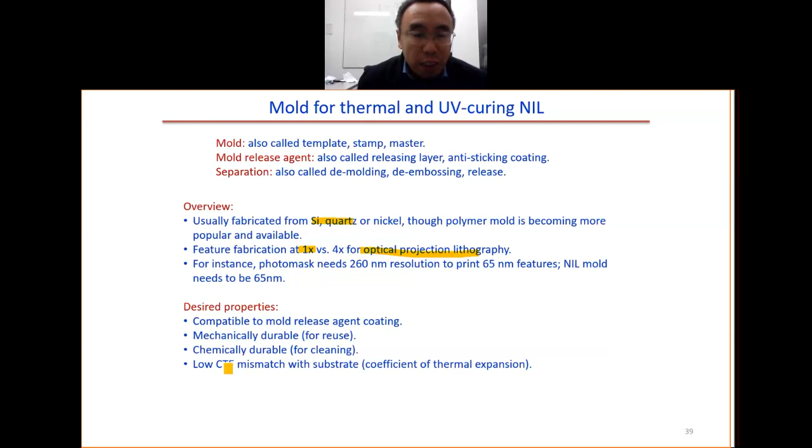So the property we need for the mold: first, compatibility with the mold release agent coating. This is very critical because many materials, even though they have good mechanical or chemical properties, are not compatible with the mold release agent coating. Then we need it to be mechanically durable, chemically durable, and have a low coefficient of thermal expansion mismatch.

For optical lithography, because of diffraction, we need many tricks to improve resolution, such as optical proximity correction. Another thing we work on most is the phase shift mask. We also use the phase shift mask for optical lithography. For the imprint, we don't need optical proximity correction or phase shift mask. All we need is to make a mold that can achieve very high resolution patterning.

So here are the mold issues. First, regarding the sidewall angle: this will be difficult, because when you do the imprint, it's very hard to separate, it will be like stripped. A tapered sidewall will be easier for separation, but then you lose resolution, since the feature size on the bottom is different from the feature size on the top.

But a vertical sidewall is obviously easier to detach the mold from the wafer. For sidewall roughness, if the sidewall is rough, this is not good for separation. This kind of sidewall shows a ripple, wavy, zigzag structure, which is the typical profile using a deep RIE.

For deep silicon etching, let's use the Bosch process. When we use the Bosch process, we get this kind of wavy sidewall profile.

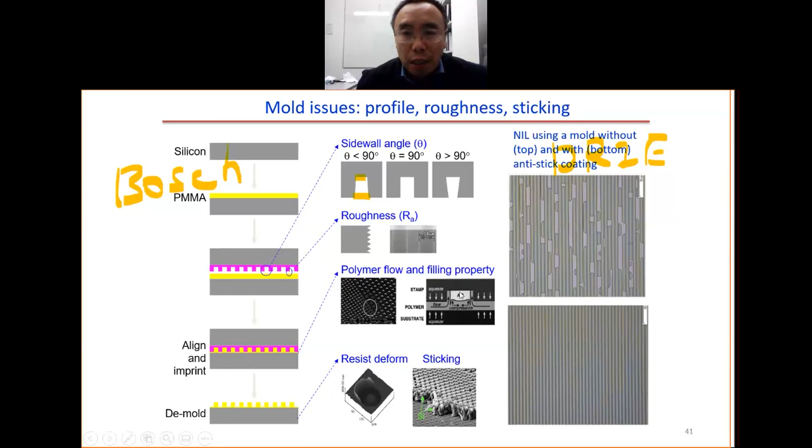For the mold, another issue is polymer flow and filling property. If we have very big features, the filling may be a problem. Finally, there's resist deformation. You can see here the resist got deformed, with a sticking problem. This is also a major problem.

As you can see here, on the top side, the mold without anti-sticking, anti-adhesion coating shows peel off, where the resist got peeled off. On the bottom side, with the anti-sticking coating, there is no peeling off. So how do we do this anti-sticking coating?

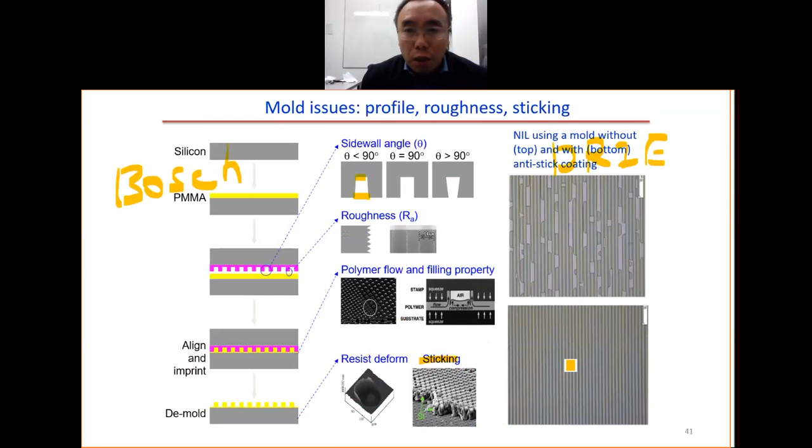This is actually the major secret for imprint lithography. In 1995, Professor Stephen Chou's group from University of Minnesota asked a student to spend about a year to find how to make the mold have very low surface energy. But he wanted to keep it secret. So when he published the paper in Science, he stated clearly that no mold release agent was needed. But actually, this was wrong information, meant only to mislead people. As a result, other people could not duplicate the imprint for maybe 2 or 3 years, until they realized that you need some anti-sticking coating on the mold surface to make it actually work.

This material is the most popular one for mold treatment, called FDTS, perfluorodecyl trichlorosilane. Another popular material is called FOTS. The only difference: this one has O, which stands for octyl, meaning 8.

This one is D, the decyl. Decyl means 10, so we have 10 carbons. This one we have 8 carbons.

We know fluorocarbon gives you low surface energy, but you cannot coat fluorocarbon onto the wafer surface. For example, the most popular fluorocarbon material is PTFE, polytetrafluoroethylene. This will obviously give you very low surface energy. This is also called Teflon. But if you coat a layer of Teflon on the wafer surface, this will not work because the Teflon will not adhere to the wafer. So the Teflon film will not adhere to the wafer, and when you do the imprint, it will be peeled off easily.

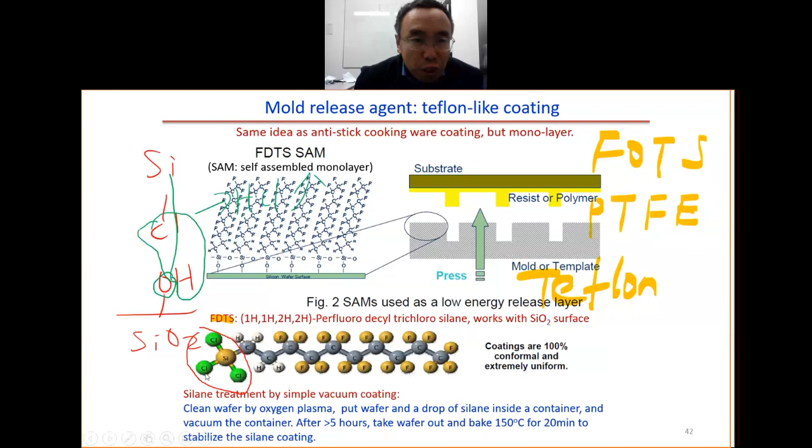But here you also see the lateral bond, the silicon-oxygen lateral bonding. How does this lateral bonding happen? This is because you have trichlorine, three chlorines. How does this work? It's like this: we have one silicon here with chlorine, and you have another nearby one, silicon here with chlorine.

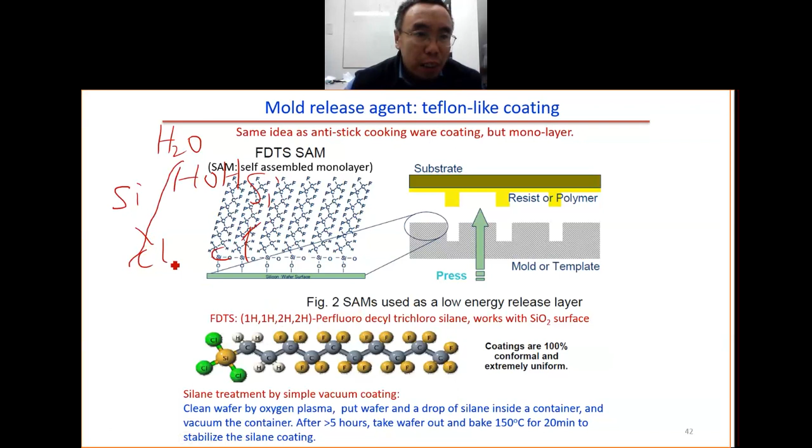In the environment, there is always water, and water is like HOH. Effectively, this H will take away this chlorine to form HCl, and this other H will take away the other chlorine to form another HCl. So in the end, you leave behind this oxygen here, and this oxygen will come to here. So you have this oxygen here, and you get this silicon-oxygen-silicon bond. Effectively, you form two HCl molecules to take away the chlorines, then you have the oxygen bond.

So normally you clean the wafer, then you put a drop of the silane on the wafer. This silane is a liquid. You put a tiny drop, maybe a microliter, inside the container and pump, vacuum the container. After several hours, you take it out, do the baking, and you get a very high coating quality, making the surface very hydrophobic.

Some of you may know we have this nanorobotics group, at the University of Waterloo. The task for the nanorobotics group is to move micro objects as fast as possible and pass the barriers. You move the object very fast.

When you want to move the nano or micro object very fast, you need the surface to have very low surface energy, very low friction force. The people from that group came to me, maybe 7 years ago, and asked me how to make the surface very low friction. I told them to do this kind of process. Later on, they won the first prize in the nanorobotics competition in the world.

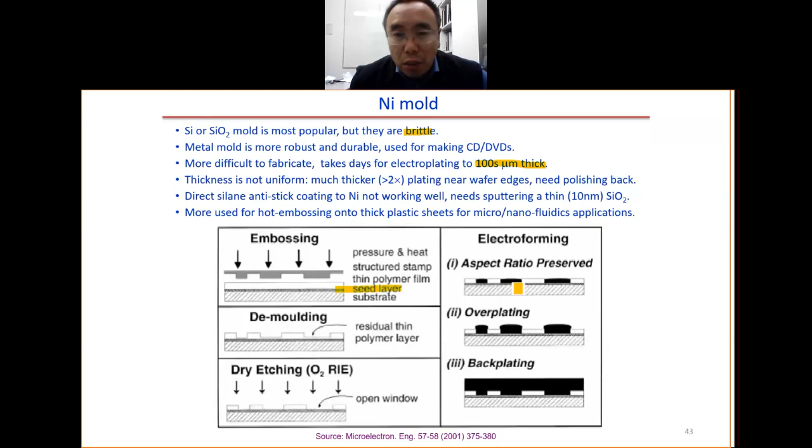Then you do the electroplating, you overplate, you grow the backbone, which is hundreds of micrometers thick. This takes a day or maybe even longer time to do the plating process.

Another problem is that the edge plates faster than the central part. You can imagine when you have more ions come here. When you do the plating, you get more ions to the wafer edge than to the wafer center, so the growth here will be faster than the growth on the wafer center.

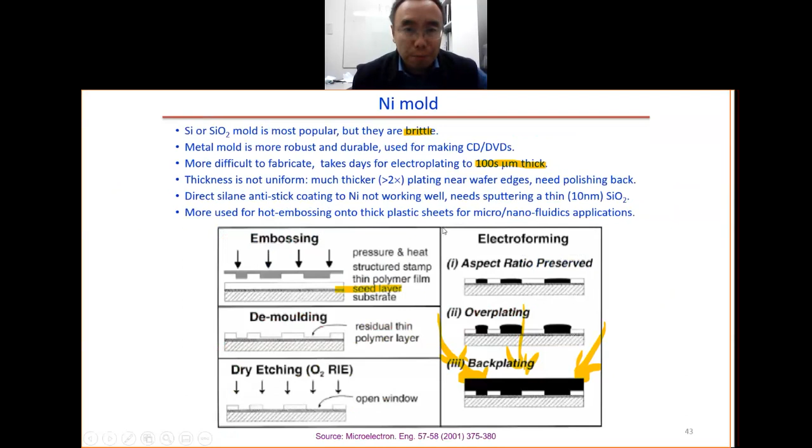You need a polish-back process. Another problem is that nickel is not very good for the anti-sticking coating. So what you can do is coat a layer of silicon dioxide, then you can do this process to make the surface a low surface energy. And this is the nickel mold.

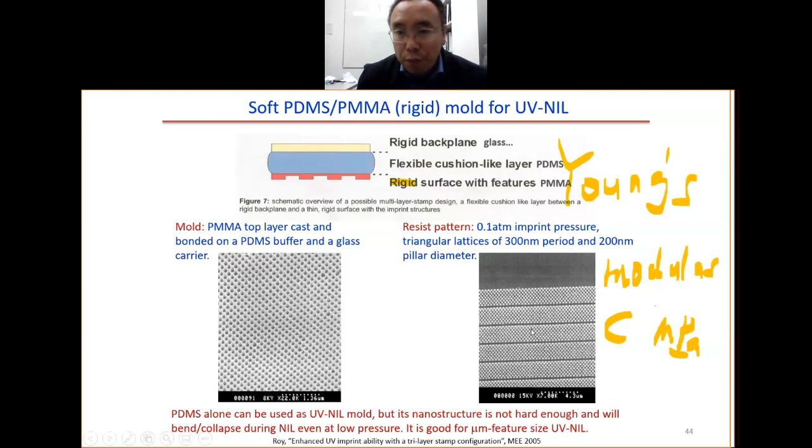But here you can see you have this mold. After imprint, you get the pattern into the resist. Here it's done by using UV imprint, at very low pressure UV imprint.

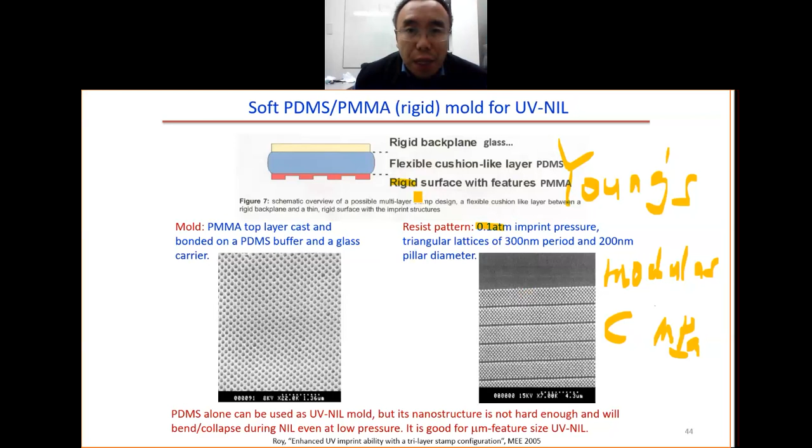But the problem is that the PMMA is not compatible with this process. You cannot make the surface low surface energy. As a result, maybe after one imprint or maybe two imprints, the mold will have lots of peel off. This one in that case is not good, it's only good for maybe one or two time imprints. Then there will be a peeling off problem because this one cannot be made low surface energy.

This one is good, you can have very low surface energy with this anti-adhesion layer. This one, the backbone is PDMS, a plastic, soft plastic. Because it is plastic, you can do the imprint onto a curved surface. You can see here, you do the imprint on the optical fiber because the PDMS is flexible, very very flexible, soft.

So how do you make this mold? First you coat the coupling agent and coat the imprint resist. This is the PDMS, you coat the coupling agent. Because the resist has low surface energy, we use a coupling agent, you get better adhesion of the resist onto the PDMS substrate.

Then you do the UV imprint. This layer here is the UV resist, the UV curable resist. You do the UV imprint, they separate, and you get the mold. So you can see, it's not hard, it's not difficult to copy the mold from this master mold onto this polymer mold.

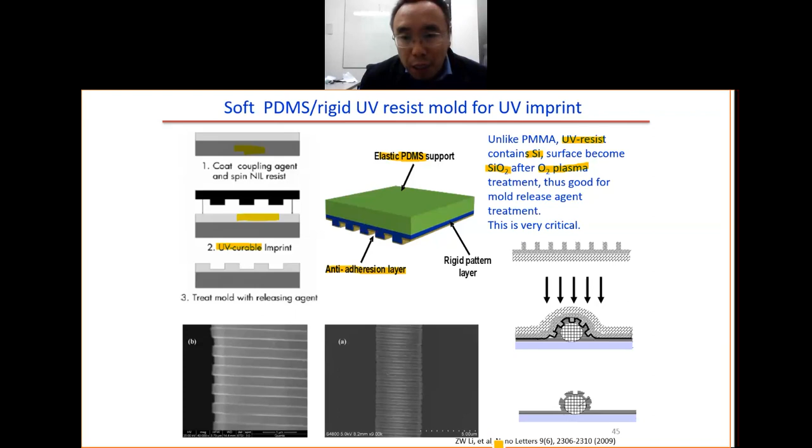So here the mold material, this one is the UV curing resist. We know that for the UV resist, it contains silicon, lots of silicon inside. Then if we do the oxygen plasma treatment, the surface will become silicon oxide. So when the surface becomes silicon oxide, you can do this process to make it a low surface energy for imprint. That's why this is a very good mold, that's why it's published in Nano Letters, a very good journal.

So this is the fluoropolymer mold. We know that normally the master mold is very difficult and expensive to make. So to save the master mold, we can copy the master mold into a polymer mold, then use the polymer mold to do the imprint.

So the good polymer is the fluorocarbon polymer. This polymer is good because it has a very low surface energy, for easy separation. But Teflon is not very good, and we will see later on that it is difficult to copy the mold into the Teflon. But fluorocarbon, the other fluoropolymer, is good.

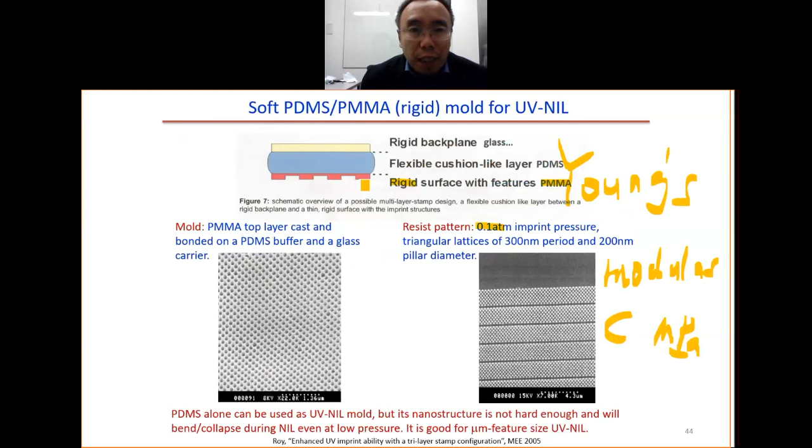So this process, even though it works well to give you low surface energy, the issue is that when we do the UV imprint, we do, for example, free radical polymerization.

We have lots of free radicals. But we know that free radicals are very reactive. Those free radicals will damage the self-assembled monolayer. As a result, after maybe 10 imprints, you need to coat the self-assembled monolayer again. Because of the free radicals, when you do the UV imprint, you generate a lot of free radical polymerization. This is not good.

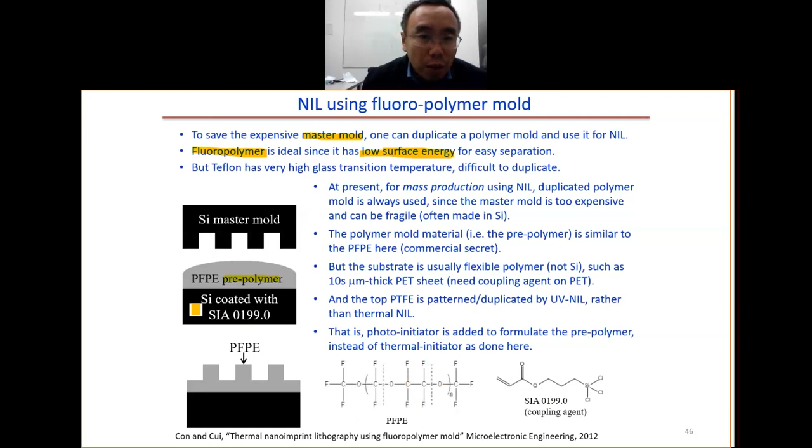We need this coupling agent. With this coupling agent, adhesion of the pre-polymer to the substrate will be better. Then you press the mold onto it, then you do a thermal process, anneal it at a high temperature, and it becomes annealed and solidified. Then you get the mold.

But this is what was published in this work. At present, I learned recently that for mass production using imprint, this kind of polymer is actually used for the polymer mold. But this kind of thing is not published - people don't publish so much. I will talk to people from the company; they can tell you this kind of information.

But the substrate here - in this work, the substrate is silicon. For mass production, we don't want silicon. So what it is, is a PET sheet, a 10 micrometer PET sheet, rather than the fragile silicon.

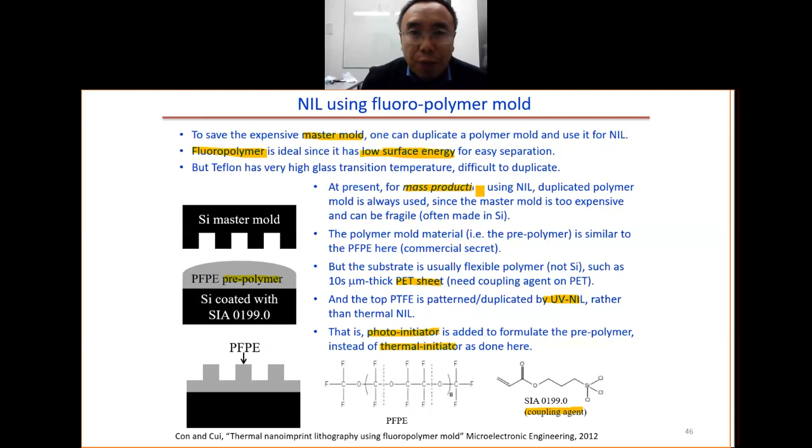Another difference is that this layer here, in this case, is cured by high temperature. But for the production of the polymer mold from the master mold, it is cured by UV imprint lithography, not by thermal lithography. That means the photoinitiator is added to this material rather than a thermal initiator. For this work here, we added the thermal initiator into this material. But for UV imprint to copy the mold, we use the photoinitiator mixed with this material. Then you can cure the mold by UV light. Again, this is for mass production - a very, very important process.

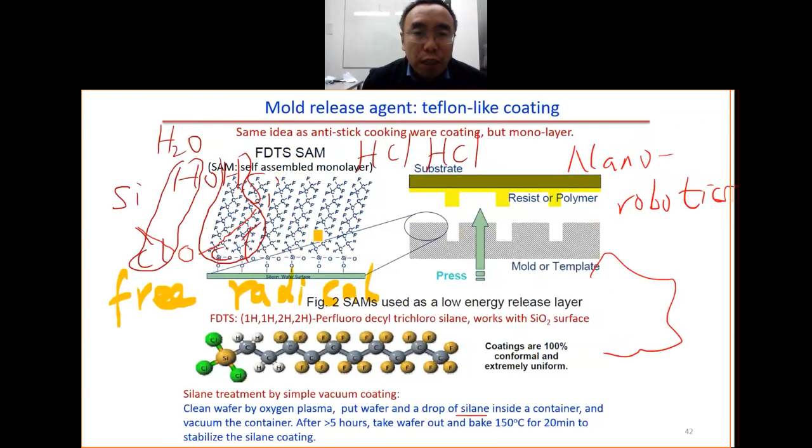So I mention again, in principle, all cross-linked polymers can be used as an imprint mold, but in reality, most of them are not good for the mold release agent - you cannot make it low surface energy. But this material here, you can make it low surface energy. It's compatible with the mold release agent.

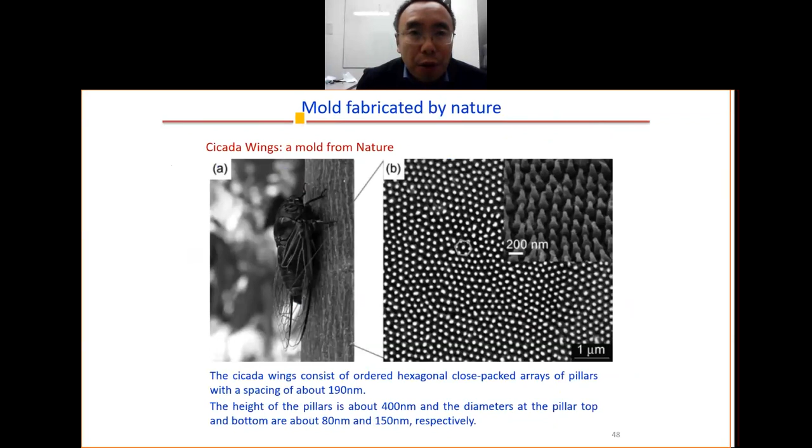Last example is the mold from the cicada wing. This material here, you can see the wing of the cicada has this kind of structure. The period is 190 nanometers, the height is 400 nanometers. This gives you the super hydrophobic property of the wing, making the surface very hydrophobic.

Some researchers found out that this wing is actually a good material for imprint. As you can see here, you can even do the thermal imprint at a pretty high pressure and very high temperature to do the imprint in PMMA. We know PMMA is not so easy to imprint because it has high surface energy, so it's hard for separation.

But for this wing, first it is stable. It is very stable at high temperature. Secondly, the Young's modulus is a gigapascal, similar to PMMA, but the PMMA gets melted so it becomes soft. This one, you get 7 to 9 gigapascal even at higher temperature.

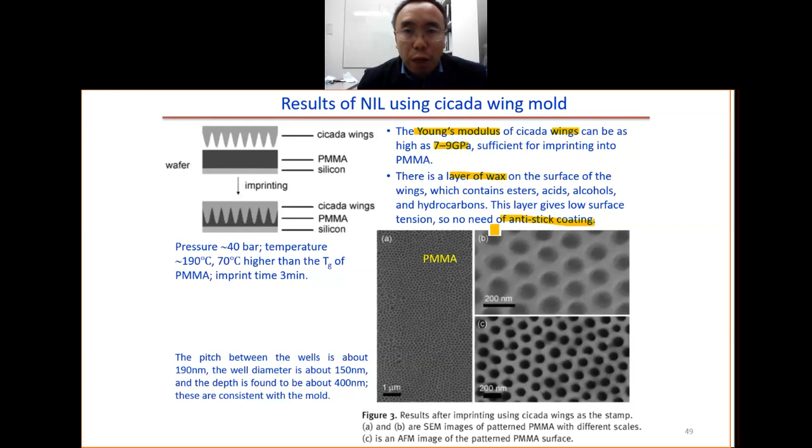More importantly, there is a layer of wax on the wing. As a result, the wax has low surface energy, so it's easy for separation. That means the wing naturally has an anti-sticking property. So we have anti-sticking, low surface energy combined with the structure, you get super hydrophobic. So the water will fall off. This is good for this cicada.

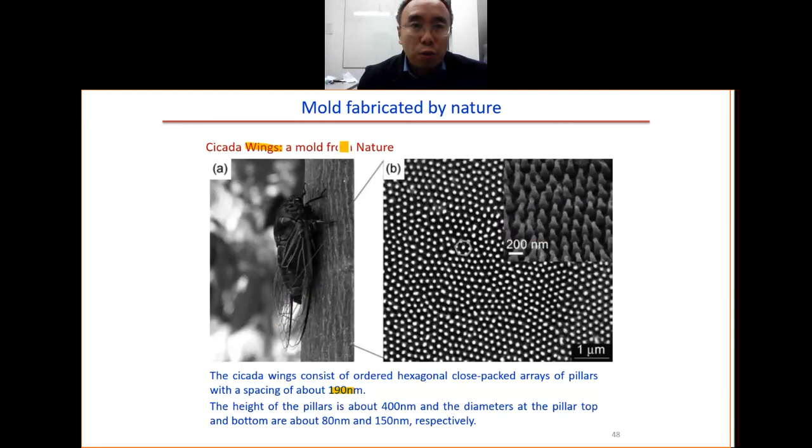So now let's look at alignment for imprint lithography. There is a big challenge for alignment in imprint lithography, because first, we have a smaller error budget.

For the case of imprint, we have this 1 times error. That means if the misalignment is 10 nanometers, then you get an error of 10 nanometers. But for optical lithography, you have 4 times reduction. If we have misalignment of 10 nanometers, it becomes 2.5 nanometers.

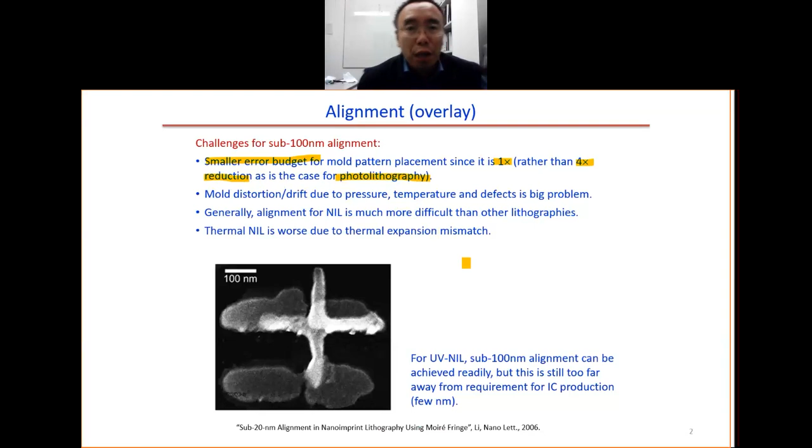The big problem for imprint is mold distortion and drift, because you need high pressure. When you have high pressure, it's very hard to keep things stable, there may be some drift, and this will damage the alignment. Also the temperature - you have thermal expansion mismatch. For thermal imprint, it's very difficult because of the thermal expansion mismatch. For UV imprint, it is easier, but still very difficult because of the high pressure.

As a result, normally when we do imprint, we do not do alignment. We just do one layer, then it's done for the devices. But in principle, you can do the alignment, it's just not as easy. In the example here, we got 20 nanometer alignment by doing imprint, but this, in reality, is not so reliable. Sometimes if you have very bad luck, you don't get good alignment.

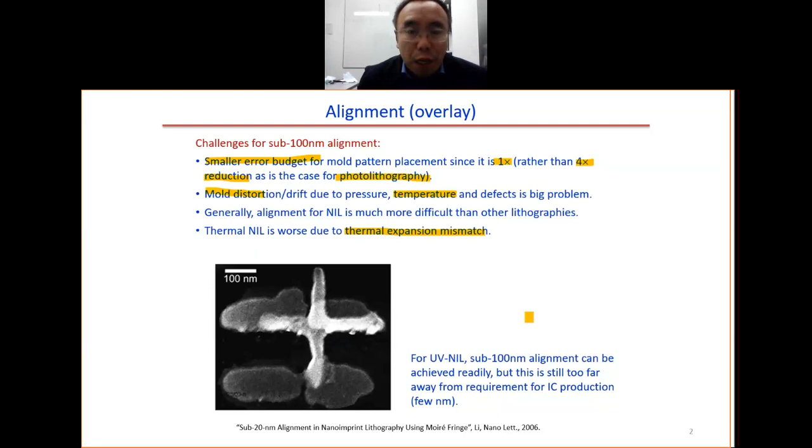So how to do the alignment? One method is, normally when we do optical lithography, we use this kind of alignment called cross alignment. For this cross alignment, you have an alignment mark on the mold. You put the complementary pattern, a square here, the other square here, the other pattern on the other square, then you measure them to get the alignment. This gives you about half micrometer alignment accuracy, which is not good for nanoimprint.

For nanoimprint, we want about 100 nanometer alignment accuracy. So how to do that? One way is to use a grating. You put the grating on the mold, you put the grating on the wafer, they have the same pitch, you shine light, and do the detection by transmitting the light. In this case, we measure the zero order diffraction. When they are aligned like this, you get the maximum signal.

We can also do first order alignment. When we do first order diffraction, you have laser light coming in, you get one diffraction to the left, one to the right. So you measure the distance. When they are symmetric, when they are well aligned, you get the minimum signal, zero signal. That's one way to do alignment - we use gratings, and the shift, the relative position of the two gratings, tells you the misalignment.

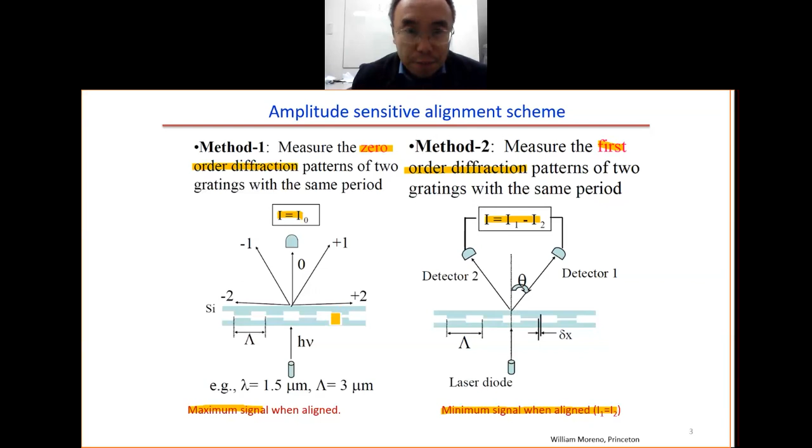Another method is called the Moiré pattern. What is a Moiré pattern? We have two periodic structures. When they are misaligned, you will see some larger feature set show up - this is the Moiré pattern. We will see this one later on. So the strategy is first we do coarse alignment using the optical lithography method, then we do fine alignment using this Moiré pattern.

Here is one example. You have this concentric ring with the pitch P1, and you have the same thing with the same pitch P1. Then you put them together. This one is aligned. When they are aligned, you see this pattern.

When they are misaligned, you see something like that. So a small misalignment, you can see this thing will show up. The misalignment is magnified by this Moiré pattern.

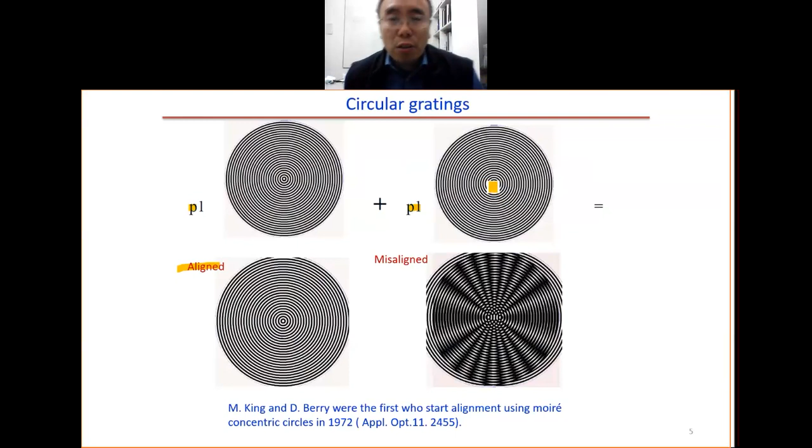If you look at the pattern here from different angles, you see like a wheel rotating. This is because the screen has pixels, so the pixels can also form the Moiré pattern with this periodic ring structure.

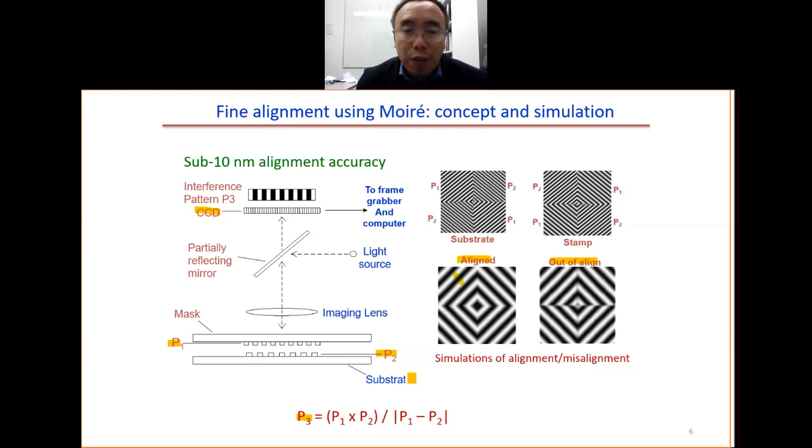Here is another way of the design. This is the pattern on the mask, this is the pattern on the substrate. You flip it over, so P2 will come to P1, and P1 will overlap with P2. Then you get something like this.

When they are aligned, you see something like this. When they are not aligned, you see something like this. Again, the pitch P3, from here to here, the distance is given by this formula: P1 multiplied by P2 divided by P1 minus P2.

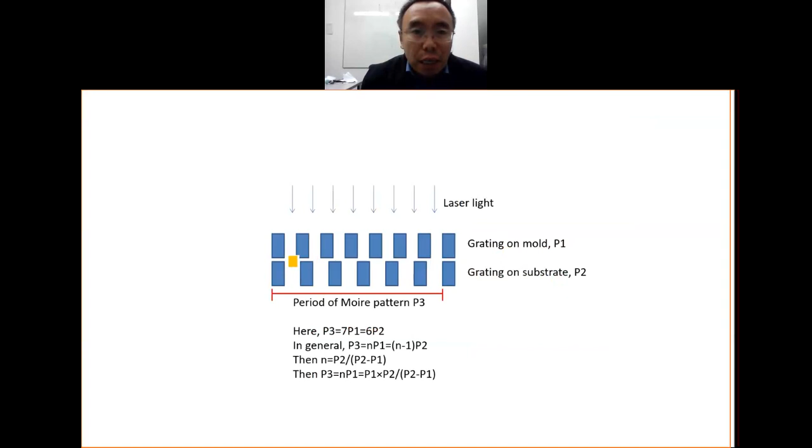Now let's look at how to derive this formula. Here we have dark and bright regions. Where is the dark, where is the bright? As you can see here, in this case we have grating on the mask and grating on the substrate. As you can imagine, when you have this kind of alignment, the light can pass through, so this is the bright.

When you have this kind of alignment, the light will be blocked, so this is the dark. This part corresponds to the dark, but this part here corresponds to the bright. So the pitch here, from here to here, is one of the pitches, P3.

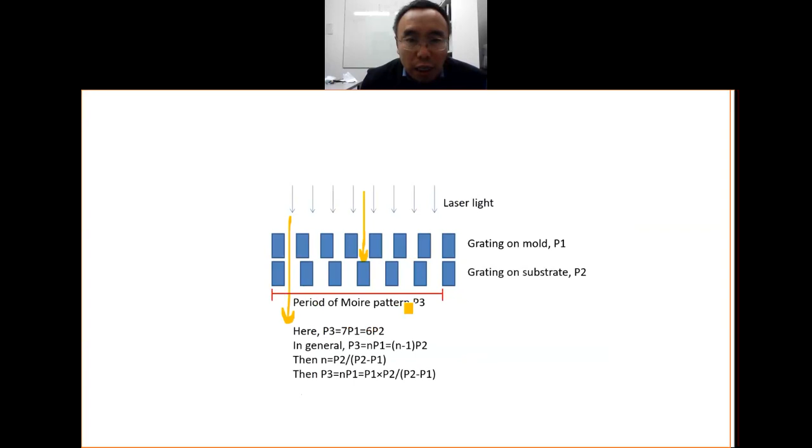This is P3. As you can see here, in this case P3 equals 7 times P1, equals 6 times P2. We have 1, 2, 3, 4, 5, 6, 7 — so 7 times P1, 6 times P2. In general, P3 is given by n times P1, and also n minus 1 times P2.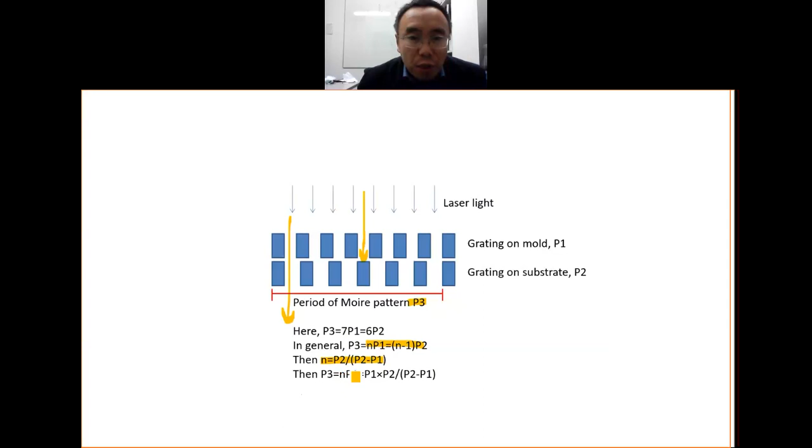From these two equations, we get n equal to this value. You put this n into here, so P3 equals n times P1, which gives you this formula. This is the same as this one, and also the same as that one. So this is how you do the alignment.

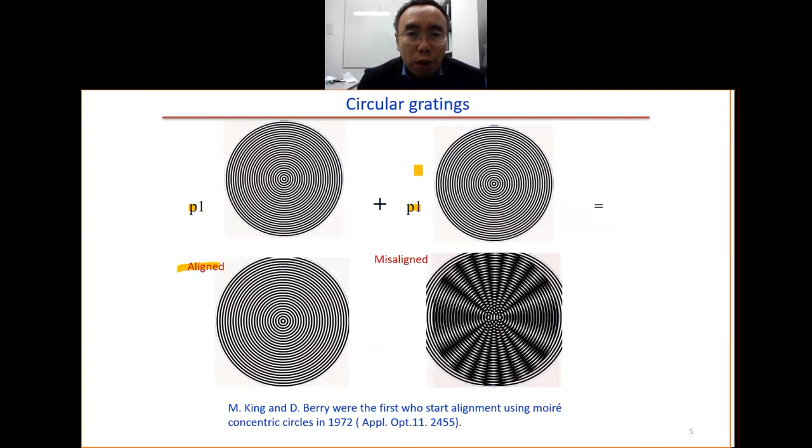Now I will show you a video for this Moiré pattern. It is a fun video. The Moiré pattern here, as I said, involves two periodic patterns that do not have the same period. When they overlap, you see a magnified pattern.

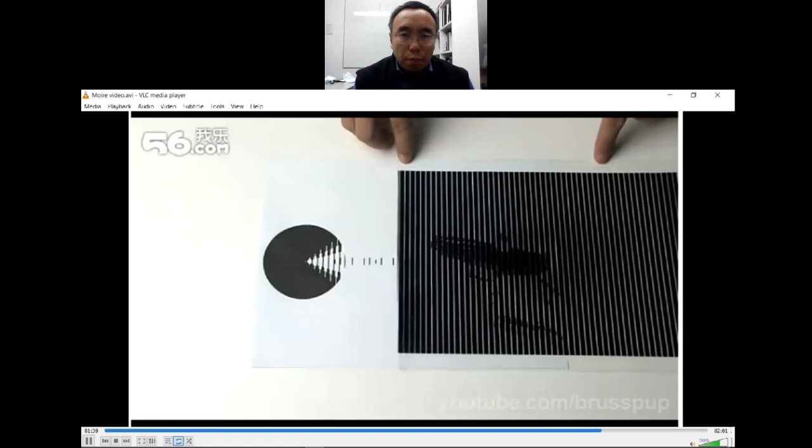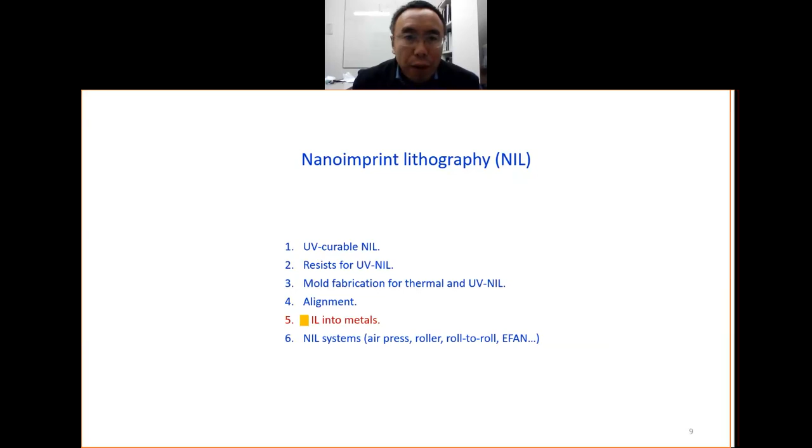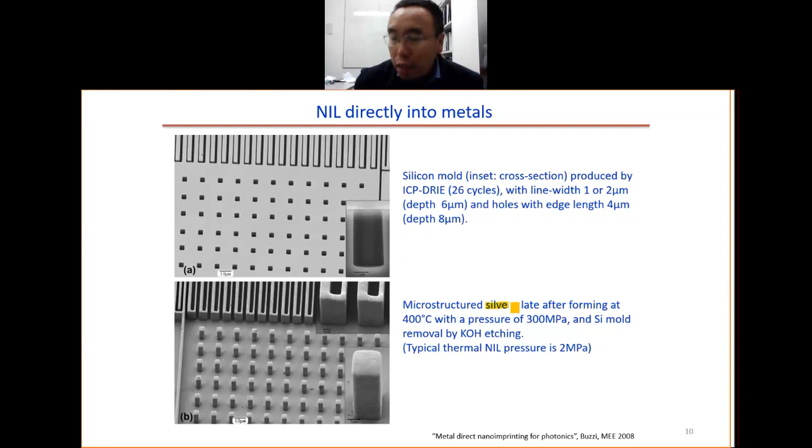Now we look at imprint into the metals, imprint into metals. In this first example, we do the imprint into silver. We know that silver has a melting temperature of about 962 degrees. This is the melting temperature for silver. But here the imprint is done at a lower temperature, 400 degrees.

But the pressure is very high, they use 300 megapascal pressure. Normally for thermal imprint we only need 2 megapascal, but here it's moderate temperature and very high pressure. This is the mold, the silicon mold made using deep RIE. This deep RIE again shows wavy structures, which is a result of using the Bosch process.

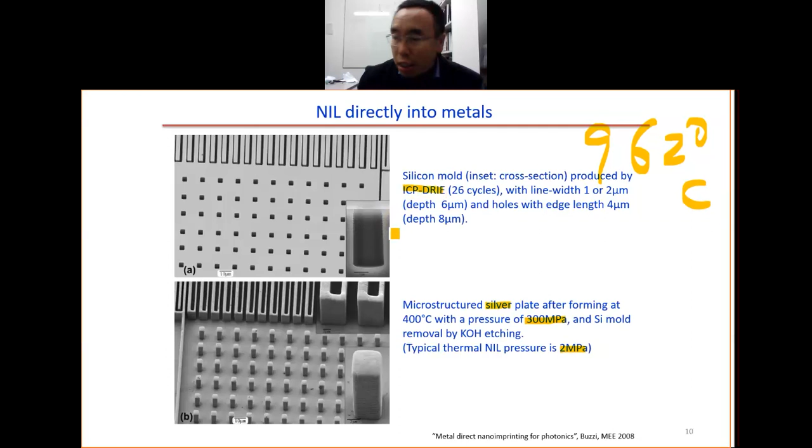Use the Bosch process to make this mold. Because this one is rough, and also we have this negative taper angle, as a result the separation will be very difficult. In this case, the mold is not separated from the silver, it is actually dissolved. So the mold is dissolved by the KOH etching, and this way you get the silver pattern in the end. This is a demonstration to show that it is possible to do imprint into the metal, but you either need very high temperature or very high pressure. So that is not easy.

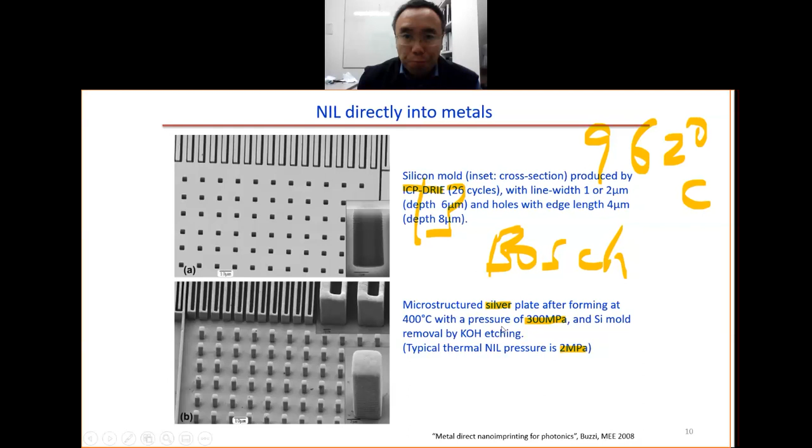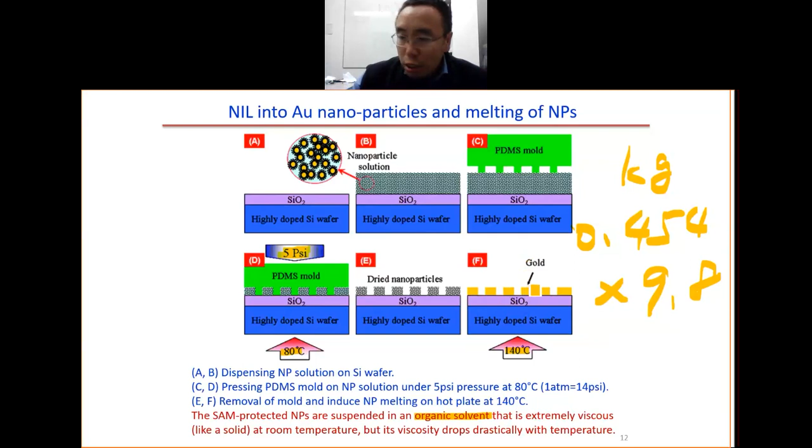You may wonder, how come we get these sharp corners? We have the metal substrate, gold. If the gold got melted, you would expect something like a ball, because of surface tension, the melted gold should have a spherical shape.

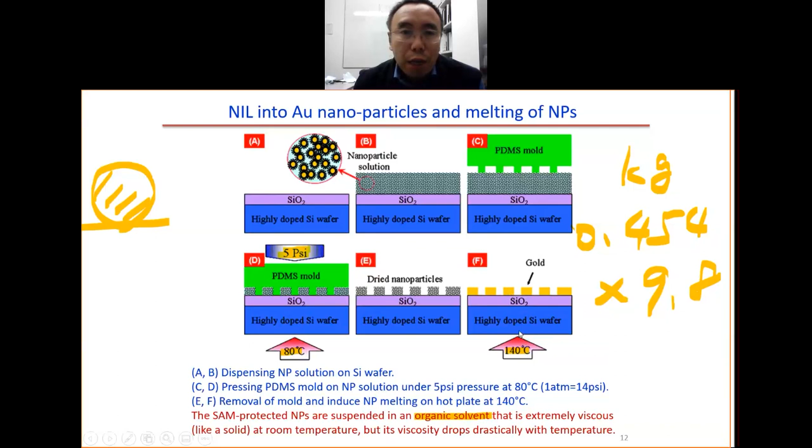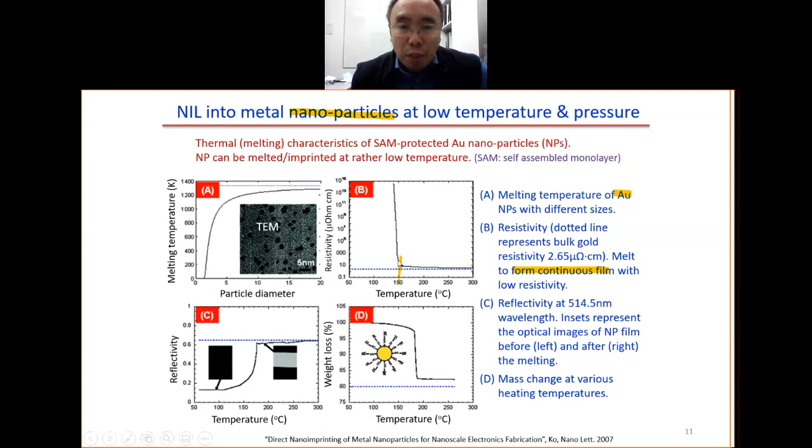But in this case, it is melted only momentarily. We have the nanoparticles, they got melted, but once they melted and came together, you get this bigger gold, no longer nanoparticle, so the melting temperature goes up right away. That means the melting point here is 140 degrees, but once it gets merged together, the melting temperature becomes more than that. That's why I said you cannot do imprint into gold at 150 degrees, because once they merge, the melting point goes up right away and it no longer flows.

In this example, we can do the imprint into the metal using laser pulses. We know it's hard to melt the metal, you need a high temperature, but it can be easily melted using a laser pulse. The example here shows imprint into bulk silicon, this is not metal yet, it's silicon, but we can do the same thing on metal.

Here you can see, first we press the mold onto the silicon substrate, then we shine the laser light, pulse the laser light, so the top layer gets melted momentarily for a nanosecond. The top layer got melted, then the mold sinks into the substrate, then it cools down, you separate, and you get the pattern. This way, you can pattern the silicon in one shot, and this happens only within 100 nanoseconds.

This paper is published in Nature in 2002. You may wonder what's the importance of this. Normally, when we make the structure in silicon, we need to do lithography: pattern the resist by lithography, do the pattern transfer, then remove the resist. We need 3 steps to do the pattern transfer to the silicon. But here, we only do 1 step. Just shine the laser and you pattern the silicon right away, and this is done within 100 nanoseconds. This looks very good, that's why it's published in Nature in 2002.

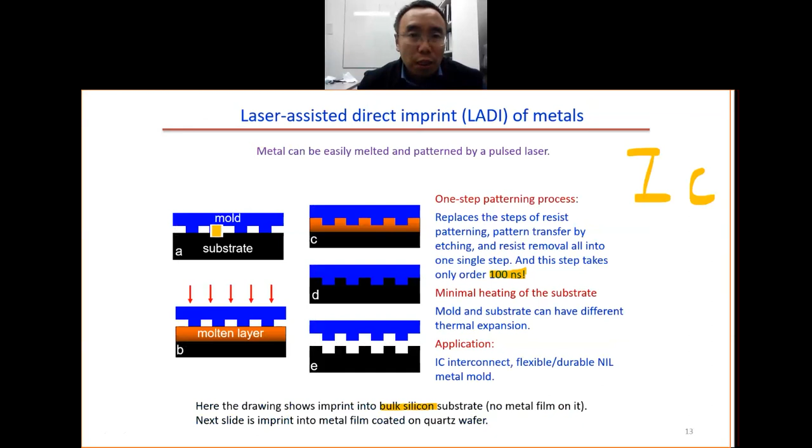So we can do a similar process using metal. The idea is simple: you coat a metal film on top of the quartz substrate, then do the same process. The metal can be melted by the laser pulse. Here we use the xenon chloride laser, which is an excimer laser.

Now let's look at how big a feature, how much pressure we need to do the imprint. We've seen this example before: the pressure is given by 2 times gamma over R, this is when we have a hole in the mold. Now here we have a trench in the mold, so the pressure can also be calculated.

So here we have the force. This is the surface tension force, 2 times, left and right. We have 2 times gamma L divided by the area. The area is W times L. Then you get the pressure as 2 gamma over W.

So what will happen then, when the liquid has already touched the bottom? How do you calculate the pressure? The pressure you need to touch the bottom, with the gap here being R, this is the R value. This is not so straightforward, but it's not hard to understand.

So what do you do? First, you can consider this volume of the liquid. Then we consider the force along this direction, the force along this direction here. So what force do you have here? The drawing is not so good.

This one should be parallel to, overlapping with, the dashed line, but the drawing here isn't so good. So you have this force here, a gamma L force, and another one here, gamma L. Then you have the force from the liquid. The liquid here will exert a force onto this surface, and this force is given by pressure times area. The area here is given by this part, square root of 2R times L. So the force here is P times square root of 2R times L.

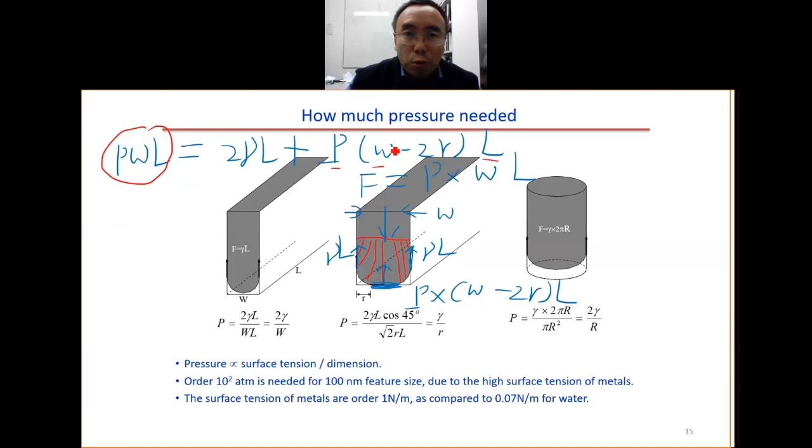P times 2RL equal to 2 gamma L. Then you get the pressure here. So the pressure is given by gamma over R. You can see it's not so hard.

So what do we do? We consider this volume of the liquid, then we do the force balance.

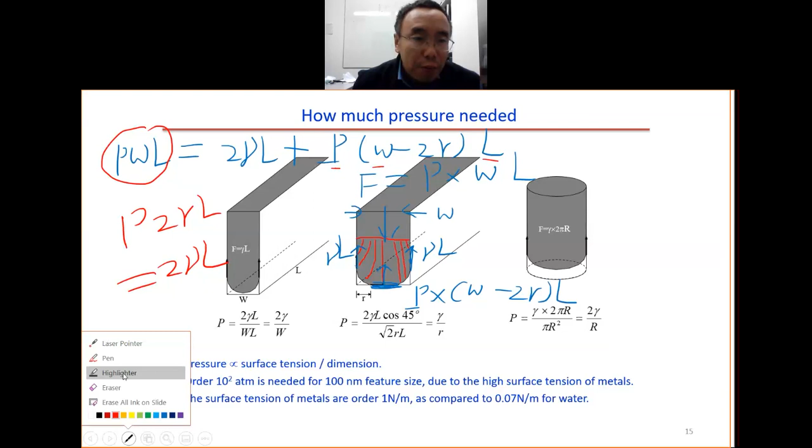We can see another example here. What happens if we have a pillar mold? So we have the mold like this, with protruded pillars. This is the side view, the top view, like this. They are pillars, so we have a two-dimensional pillar array. How do we calculate the pressure for this kind of situation?

So again, we take one pillar here, one of the pillars. We take this one pillar, then we have the liquid filling here. This is the substrate. So we consider this volume of the liquid.

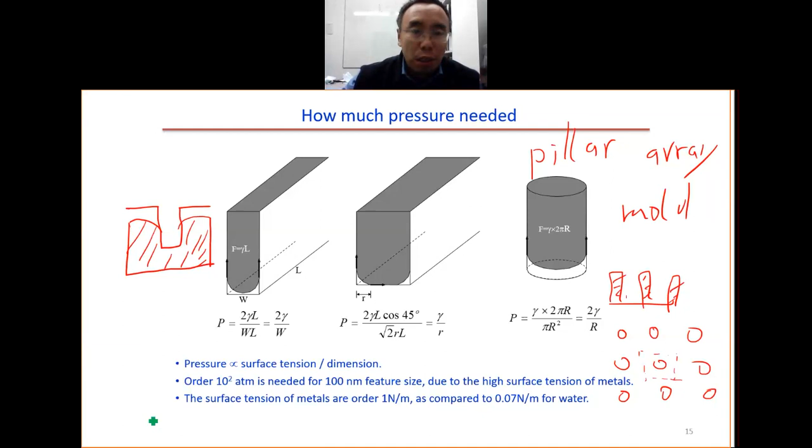So then we balance the force. Here this one is downward, this one is also downward, because they are hydrophobic, they do not wet, so the force is downward. From the bottom, we have this P times, say, L. From here to here we see W, maybe say W squared. So P W squared, this is the force from the bottom.

From the top, here we have this force, we also have this force here, but this is given by P times, if this is the circular shape, we have pi R squared. So in the end, the force by the pillar top is given by gamma L equal to P times W, where W is the period, this area here.

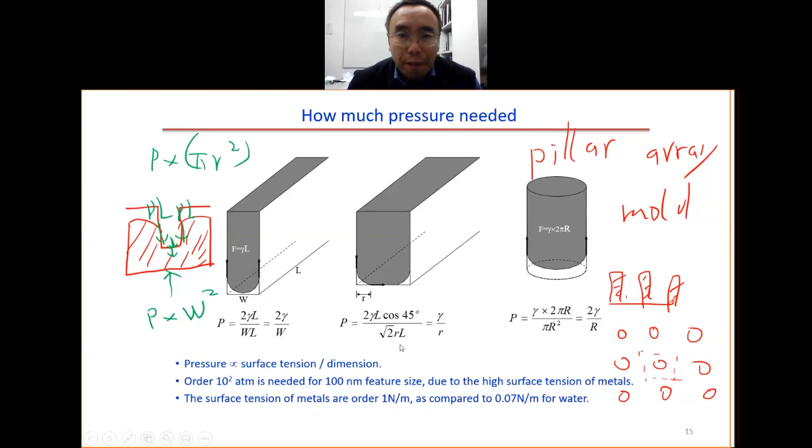Again, this way we can get the pressure. So how much pressure can we get? We know we have seen this formula before. So the maximum feature size is given by this formula.

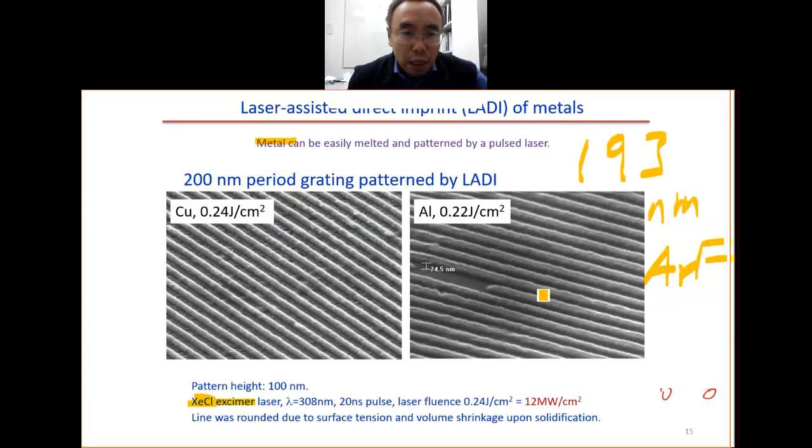For the case of imprinting into metal using a laser pulse, we use a very high pressure, 400 atmospheres. The pulse duration is 20 nanoseconds, but it actually takes another additional 80 nanoseconds for the metal to solidify. So the total time that the metal is in the molten state is 100 nanoseconds, and the film thickness is 200 nanometers.

Then we need to know the viscosity. The viscosity of the molten metal is similar to that of water. For water it's 0.00091 pascal-second, so the viscosity for the metal is in a similar range.